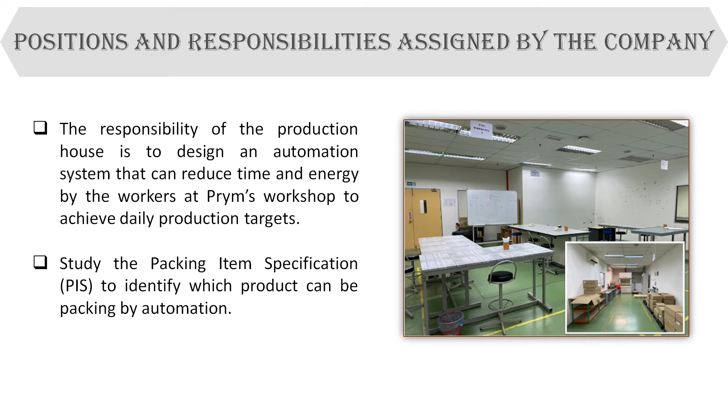So our first task is to design an automation system for a Prym's product, which is the safety pin. The objective is to analyze Prym products and identify the processes involved.

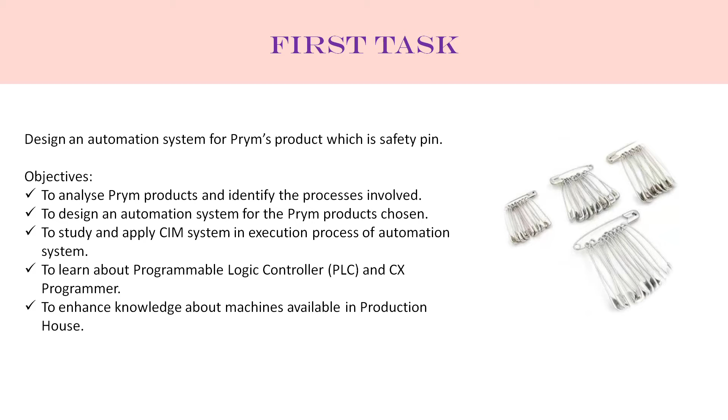Design an automation system for the chosen Prym product, study and apply CIM system in the execution processes of the automation system, learn about the Programmable Logic Controller (PLC) and CX Programmer, and enhance knowledge about machines available in the Production House. This is our design.

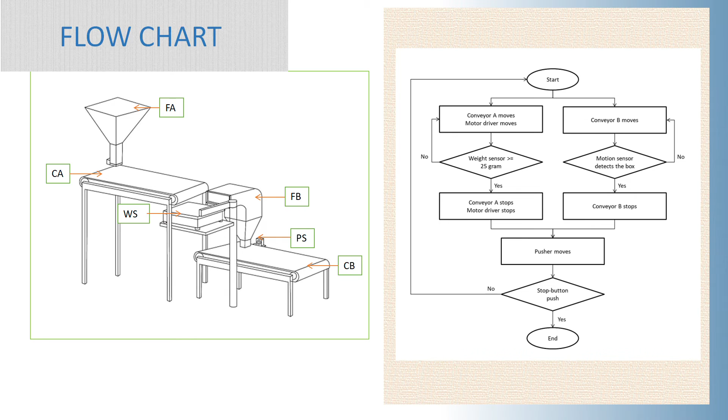The second task is to design an automation system for another Prym product, the crochet hook. The objective is to analyze Prym products and identify the process involved, design an automation system for the chosen Prym product to reduce downtime in manufacturing, and enhance knowledge about NX CAD.

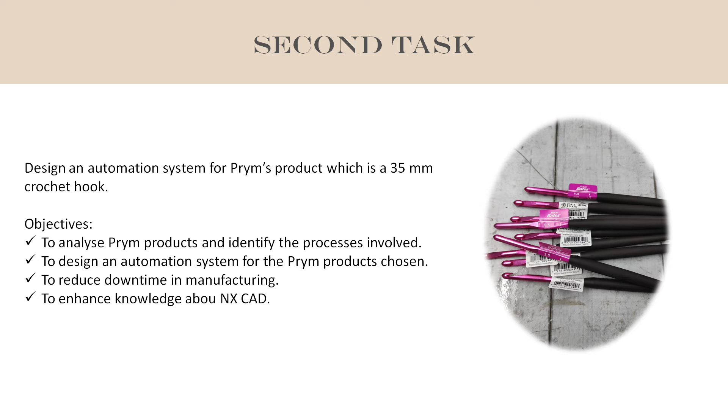So, the task details: our second task is a semi-auto machine sticker - a semi-auto automation machine. We use the concept of a bag neck sealer, or automatic label dispenser and tape dispenser.

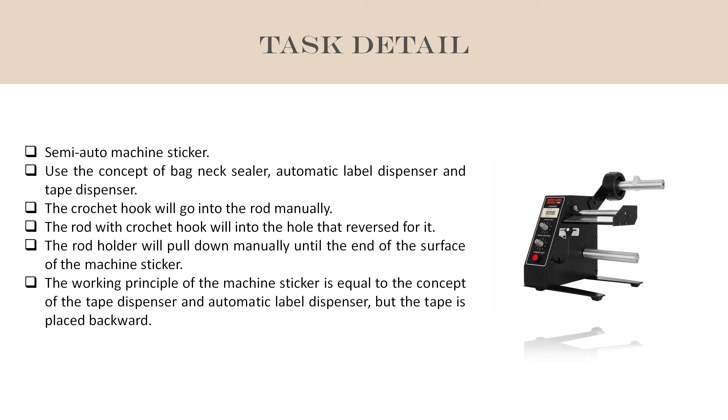The crochet hook goes into the rod manually. The rod with the crochet hook fits into the hole reserved for it. The rod holder is pulled down manually until the end of the surface of the machine sticker. The working principle of the machine sticker is equal to the concept of the tape dispenser and automatic label dispenser, but the tape is placed backward.

So this is our design, and this is our holder. The function of the holder is to hold the crochet hook. The crochet hook is placed here, and then we make it slide into this area downside.

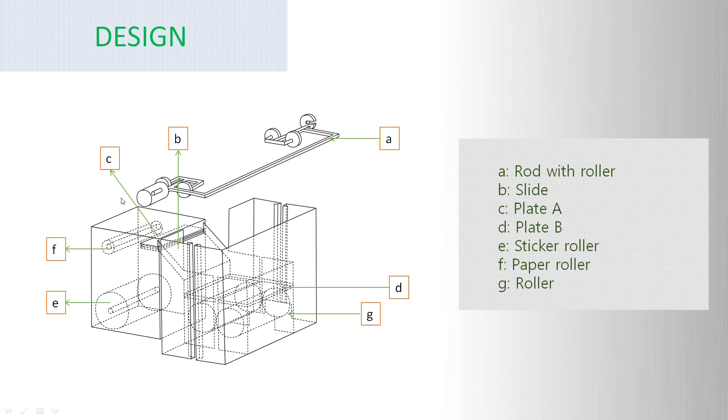Here is where the sticker will automatically come out. So when we push this down, the crochet hook pushes along with the sticker, and then it rolls, and the sticker gets attached to the crochet hook - and that's it, it's done.

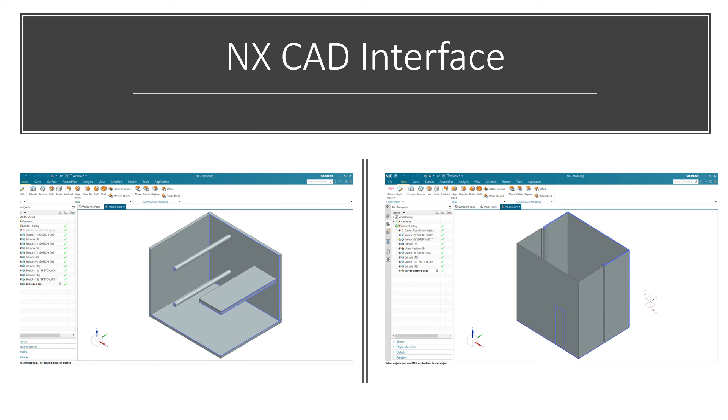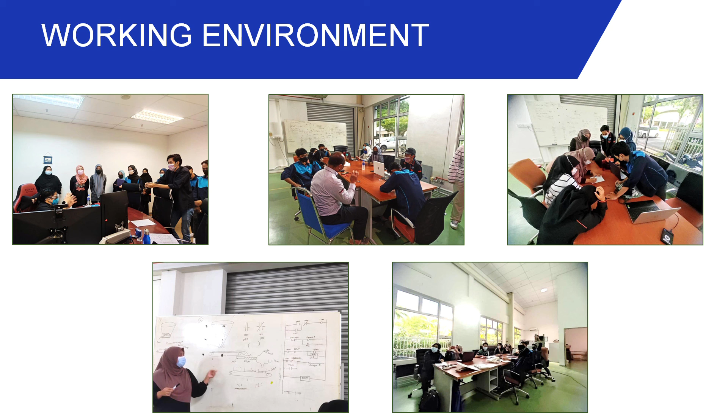What can I say? I like them all. They're all supportive, and I have a good surrounding.

Conclusion: the industrial training program in TF has given the trainees opportunities to prepare themselves as future automation experts. TF has many dedicated employees who are willing to help make this industrial training program a success, well deliver the final project, and give benefits to the company, supervisor and manager. That's all from me, thank you.